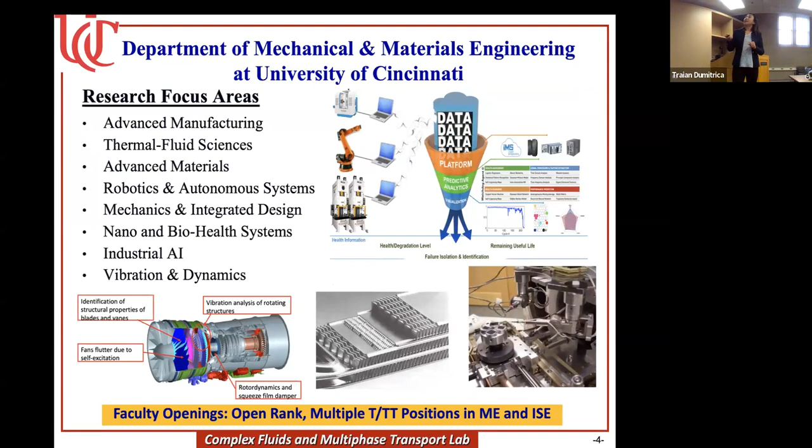Okay, so coming back to my research—I think some of you we met at the society meeting. Our lab is called Complex Fluid and Multiphase Transport. We stand at the interface of thermal fluid sciences, interested in surface science, particles, colloids, and in recent years, a lot of machine learning and AI to advance some basic understandings. Applications range from advanced manufacturing—we use inkjet printing as the additive manufacturing route—and also energy conversion and storage, we look at flow batteries and battery modeling, transport processes, also thermal management, especially in the context of the water-energy nexus. You try to minimize energy consumption when you purify water, and also use less water when you generate electricity.

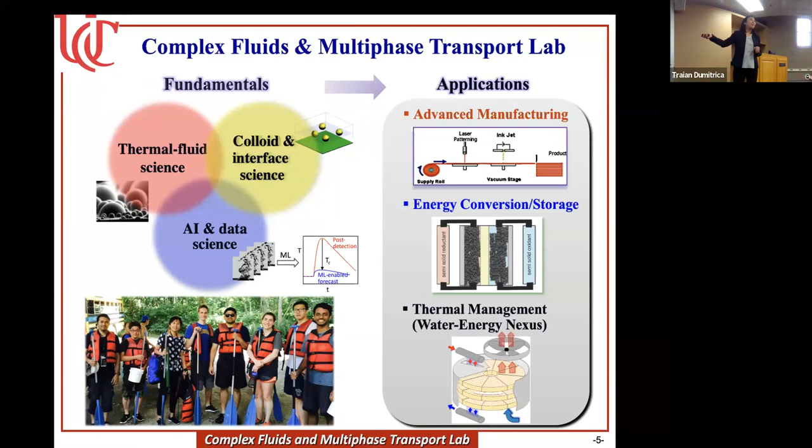Sorry to mention, but of course, students are the people who make everything happen in the lab, and thus professors travel and talk about research.

So I started with modeling, and I'm a modeling person—I was trained as a modeler. I look at heat and mass transfer, multi-phase flow with different physics, and some molecular dynamics, looking at phase change, and doing mesoscale, so-called lattice-Boltzmann simulation, looking at colloidal particle deposition, and also looking at some multi-physics of electrochemistry, looking at flow batteries.

This is an example of overpotential on the surface of carbon fiber, looking at some vanadium flow batteries, and also using molecular dynamics with reactive force field, looking at surface phenomena when you have water wetting a zinc oxide surface, and zinc oxide is photoactive, so with or without UV, you have some reactive wetting happening.

If you look at the multi-scale modeling with time and space, you have the traditional CFD, and you have this mesoscale lattice-Boltzmann, and you also have the molecular dynamic simulation with some reactive force field that account for bond breaking, bond forming, and in this so-called reactive force field, some kind of quantum mechanics simulation.

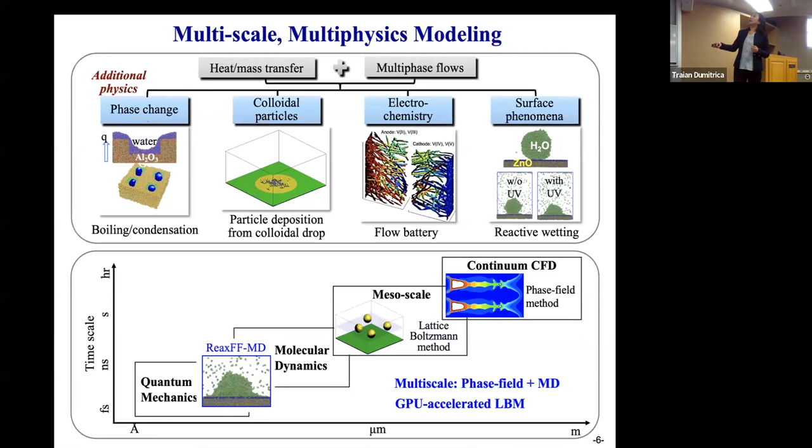We were focusing on using phase field or continuum level combined with molecular dynamics, doing multi-scale modeling with the help of accelerated mesoscale modeling, to look at how the wetting will happen, how the interface, the moving boundary, will material deliver to the contact line. So those are the modeling work we do.

In recent years, I think we talk about the total internal reflection microscopy, and more students get involved in experiment. So our lab has become a little bit more experimental, more than 50% now doing experimental work.

So this is the example of using optical methods. If you have an incident light hit a surface, and if it's above a certain angle, it will be totally reflected, and then generate the evanescent wave in the less dense medium, which has exponential decay. By looking at the intensity, the grayscale intensity of that light, you can actually probe.

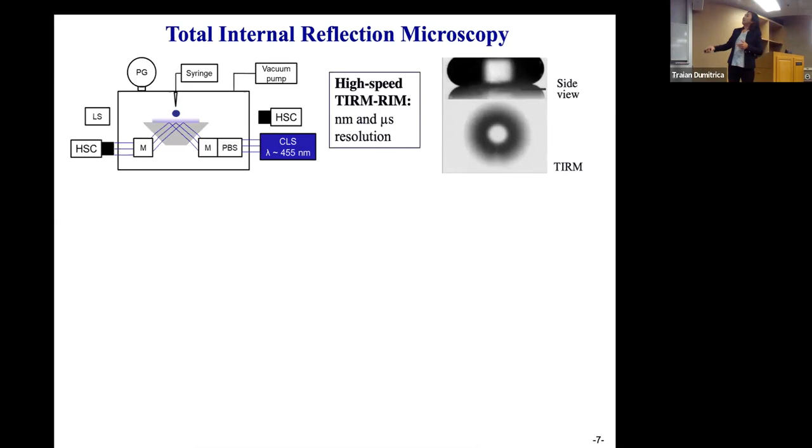So you probe this nanometer thin air film in a very accurate region, and then you 3D render. The top is the side view image, and the medium panel is the total internal reflection microscopy.

I look forward to the heat transfer work. This is without heat transfer, just room temperature. And then this is a 3D rendering of this total internal reflection.

This is like an 800 nanometer scale. So you can get the height profile at single nanometer resolution, depending on how fast your high-speed camera is, giving microsecond temporal resolution of your 3D gap profile.

That is very helpful for a lot of things, for example, boiling and nucleation, and that type of thing, whether the bubble or droplet actually hits the surface. So we use that to probe a lot of interfacial phenomena.

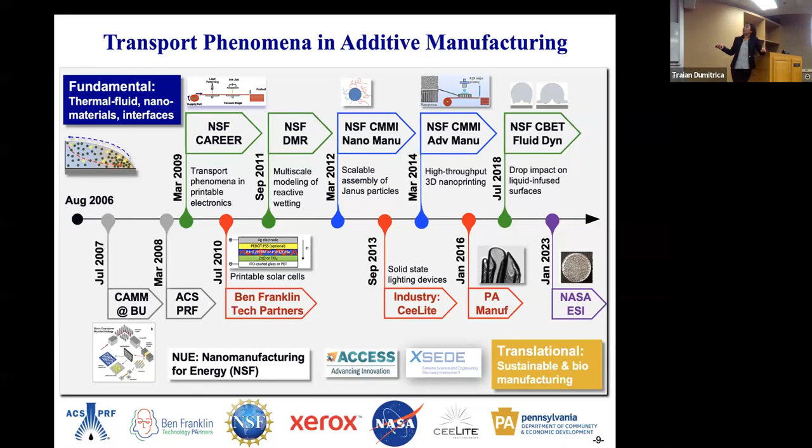So this is an example where we started trying to understand the evaporation process of inkjet printing of droplets with functional materials. You evaporate the solvent, the carrier liquid evaporates, and then you deposit functional materials. It can be electronics or other materials.

We studied the drying process using in situ characterization, observing from the bottom and looking at the velocity field, fluorescent microscopy of the life of a droplet, and doing simultaneous simulation using lattice Boltzmann methods, and also plasma and laser surface modification to help improve the status quo for better deposition control of those structures.

So this is an example of left and right, with everything else the same. We print 20 nanometer particles. So we look at this interferometry data. The left has more hydrophilic particles and the right has less hydrophilic particles, but everything else remains the same.

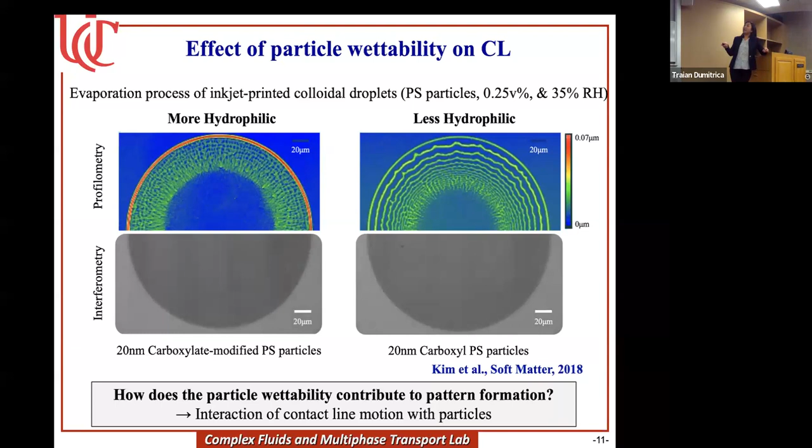What you see is the contact line being different because you have a zigzag motion in the less hydrophilic region on the right, but a continuous contact line movement on the left. This is really because if you do the force analysis of particles - surface tension force, static friction, electrostatic, van der Waals forces, and the drag force due to evaporatively driven flow - you find you need more particles to pin the contact line.

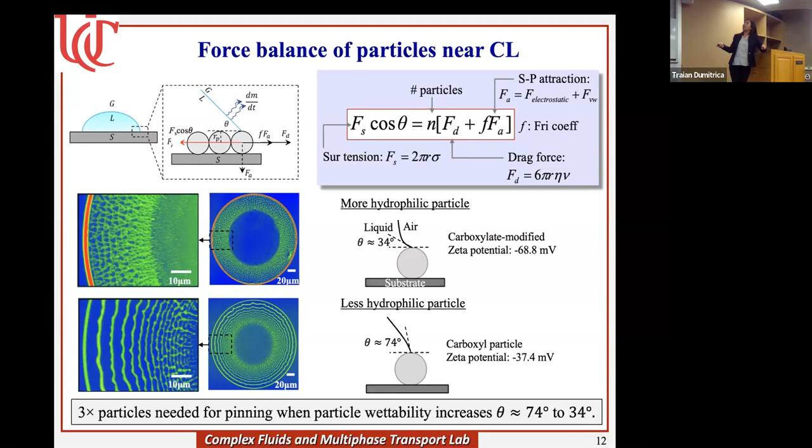You need more particles to pin the contact line. When you have more hydrophilic particles, the surface tension will pull the particle to the center, which results in a very different contact line motion and a different structure. So companies are interested in ring structures, and they really like this type of controlled ring structure deposition.

This ellipsoid versus spherical comparison relates to the so-called coffee ring structure - like when you have a coffee drop on a tissue, you'll notice the ring deposition, because evaporative driven flow will move the particle to the contact line edge and form a ring, the so-called coffee ring effect.

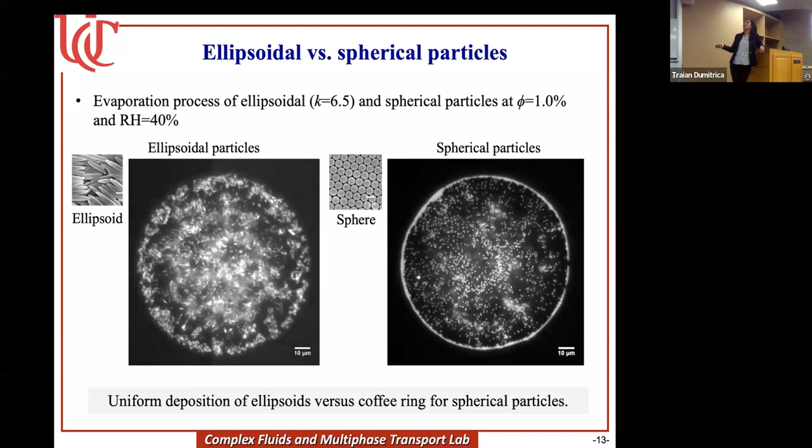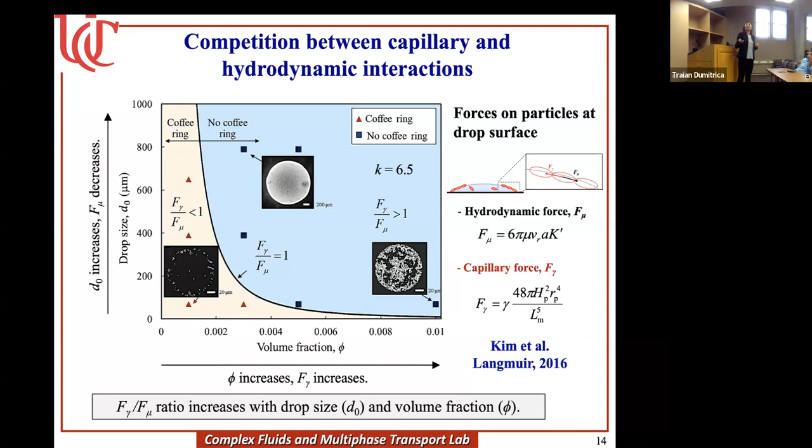So we wanted to understand the differences between spherical and ellipsoidal particles. If you look at the forces on the particle at the drop surface, the ellipsoidal particles have more adhesive forces and more capillary interactions among the particles. The capillary interactions help them stay at the surface of the droplet, while hydrodynamic forces push the particle to the edge of the droplet. The competition between those two forces eventually determines how the particle pattern will form. So we did a lot of this pattern formation type of work.

And so it was two-dimensional, and then we moved to three-dimensional. What happens if you look at three-dimensional structures? If you have a nanoporous structure, or just think about paper as a porous structure, if you print some electronics on paper, or these perovskite solar cells, they also wanted to have this nano confinement: how do you have nanoporous and three-dimensional structure in a very precise fashion? So we study that using combined simulation and experiments.

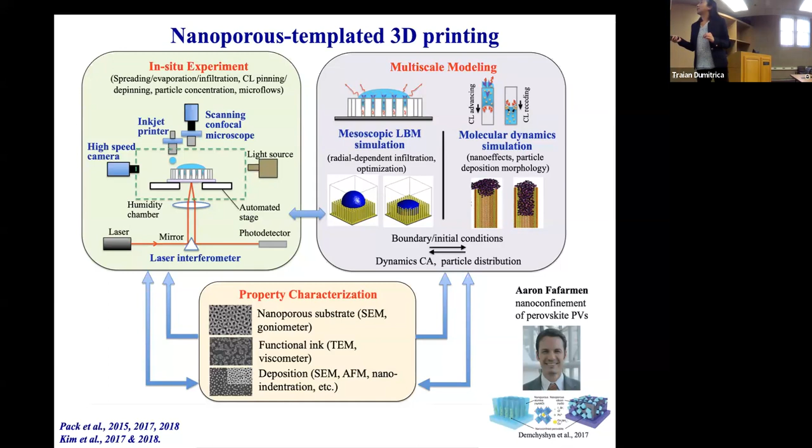And interestingly, if you have a third dimension, what happens is you have this interesting competition of particle motion, you have evaporation of the carrier liquid, you have also the infiltration, because the carrier liquid will actually wet your porous structure, and also you have the spreading effect.

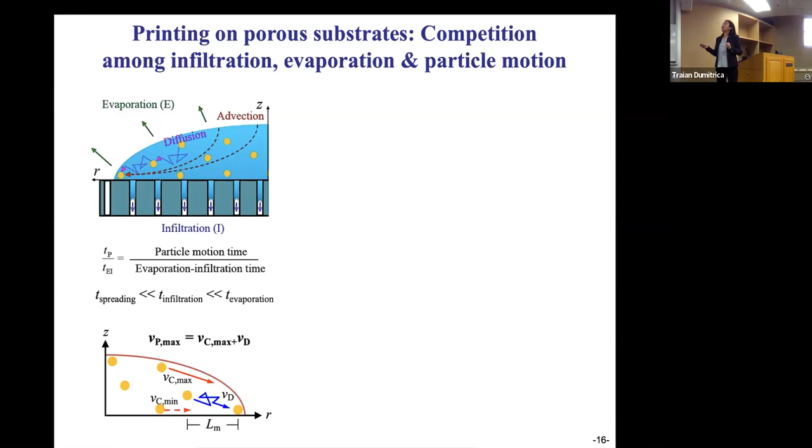And the competition of them, if you do the math, what you have is this contact angle versus the residual volume, which is how fast the evaporation will happen versus how fast the liquid is going to infiltrate the substrate that you print on. So you can have a really good kind of phase diagram to predict what the deposition will look like based on the evaporation model, and also the particle motion that is driven by both Brownian and evaporative driven motion.

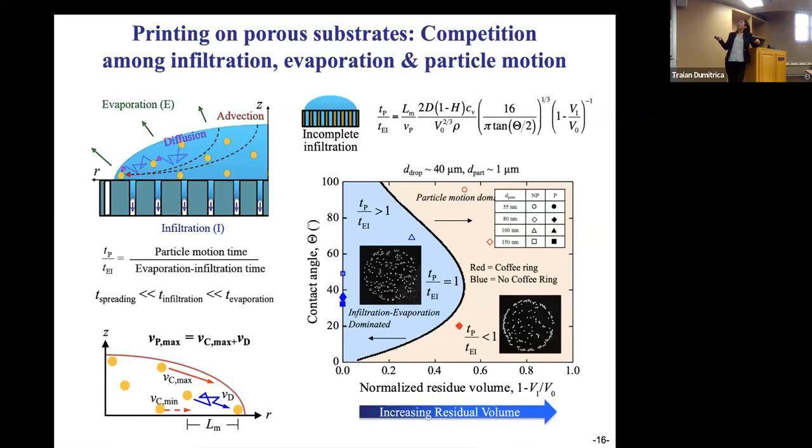And then we started working with our more biopolymer collaborators and tried to do tissue printing. They want to print hydrogel, basically gelatin, and then they can do swelling and non-swelling different structures, and have folding, and they do so-called 4D printing. It's three-dimensional, and after you print, they will swell, and based on how you design the swelling and non-swelling structures, they can fold in different shapes, to mimic different parts of the tissue.

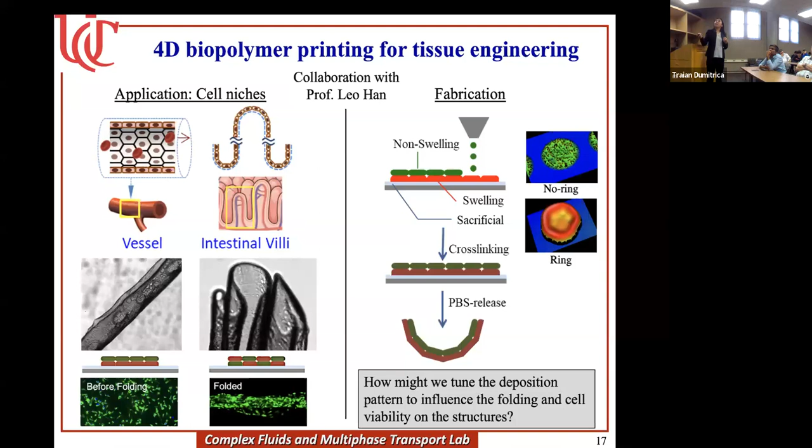So what we did is help them understand how we do biopolymer printing with different swelling ratios to control the deposition process, and how that structure will affect the final folded structures, the cell niches. So if you look at what they're printing, from a complex fluid perspective, we have water and glycerol, so it's bisolvent, and we have the gelatin, which is fish skin, dissolved, and then we make it more hydrophilic. We make the COOH group, carboxyl group, and then we have some surfactant. So it's a very complex process.

And when I look at the physics involved in this process, you guys are graduate students, you probably know what Marangoni flow is, right? It's a surface tension gradient driven flow. If you look at what happens in this droplet when you print biopolymer, which is gelatin, your water will evaporate, your glycerol is not going to evaporate, so you have a glycerol-rich region close to the contact line, the contact line will be pinned and not moving, and your biopolymer will accumulate more close to the contact line, and then it will kind of gel, and the surfactant is also redistributed.

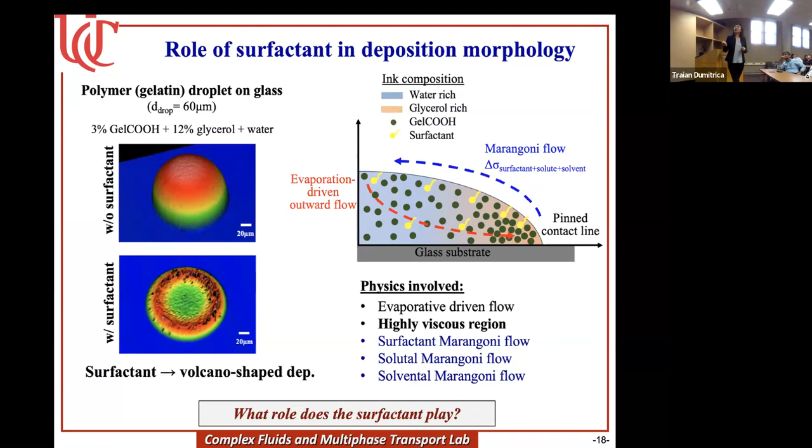You will have more surfactant close to the contact line, and then you create the surface tension gradient along the drop surface, so you have the surfactant Marangoni, and you have the polymer concentration being different, causing another surface tension gradient. So it's a very interesting, complex problem that we try to understand. And you do see that with or without the surfactant, you have very different deposition structures. The top one is without surfactant, and the bottom one is with surfactant. You can see a dome shape versus a volcano shape structure, and you wonder why.

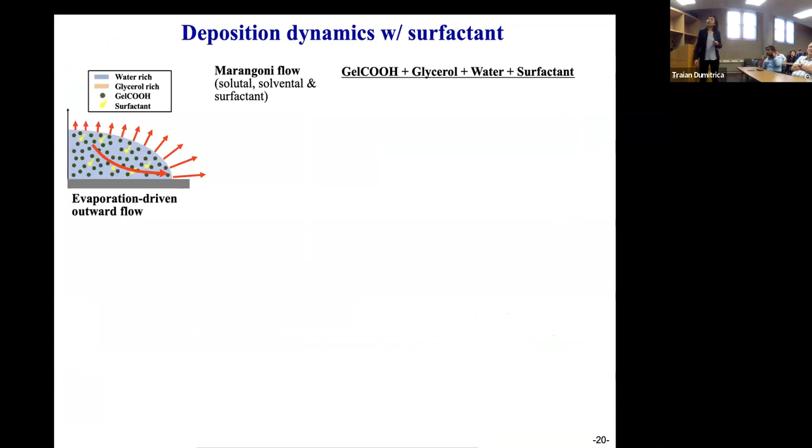So we don't know why, but why is it different from the traditional coffee ring? So we try to understand what's going on. And so what happens is when you have a colloidal drop, sessile drop evaporation, you have a larger evaporative flux at the contact region. And then it will cause the evaporatively driven outward flow.

And then you have more water evaporated, you have a lower surface tension and also a more solute-rich region in this contact line region, causing a Marangoni flow from the contact line to the center of the drop. However, due to the very large polymer content, you have a gelation in this contact line region, causing a local gel very close to the contact line.

And then your strong Marangoni will just circulate around, recirculate, causing a stagnation point closer to the contact line, and causing a zone where eventually, when the water evaporates and also the current liquid evaporates, you'll form a volcano-shaped deposition.

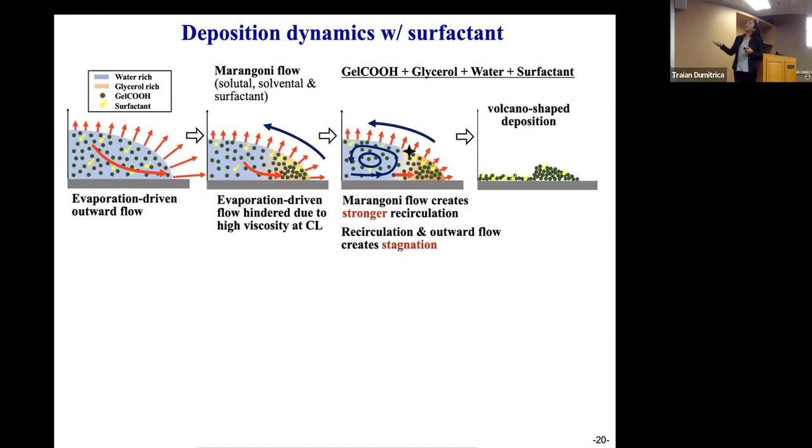So we did some PIV study, looking at different planes of the drop and different slices in the Z direction, and you do see that there's a stagnation line. You have a gelled region near the contact line where there's no velocity, but the particle is moving depending on where you are in the space. There's some evidence of this recirculation happening inside. There's a circulation flow as illustrated here inside the droplet.

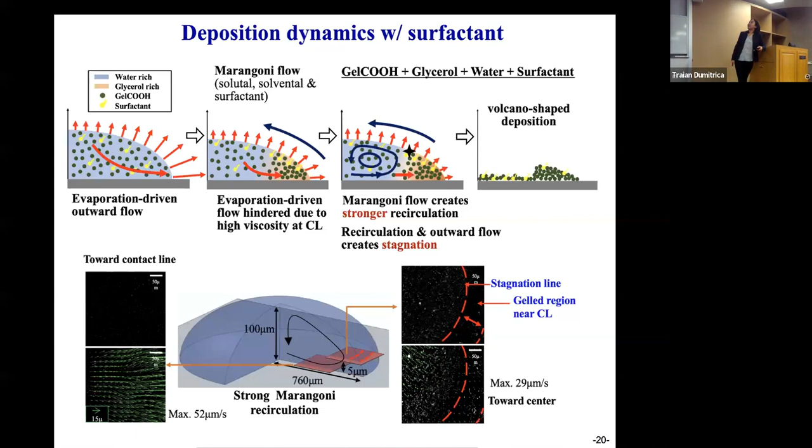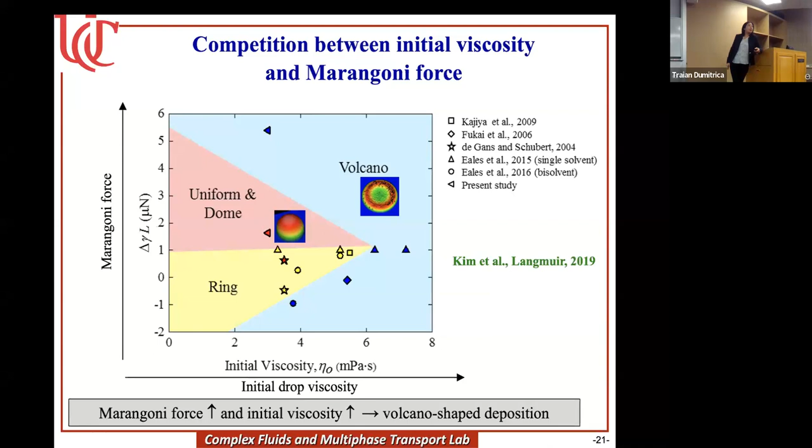This is very interesting and kind of counterintuitive, and is a result of biopolymers. They actually gel close to the contact line region, causing the deposition to be different from a regular suspension. And based on that, you can look at the competition between Marangoni force and the viscosity, basically the evaporatively driven flow. And then you can have a phase diagram looking at different shapes and compare with other people's experimental studies, and we get pretty interesting results.

And recently we're doing the NASA ESI project, early stage innovation project, which is 3D printing of titanium for a loop heat pipe, where you can drive more liquid over a longer loop with less contact. You have a lot of heat loss in the contact regions, so you minimize the surface contact and try to have an all-in-one titanium panel with the radiator and the heat pipes. So this is through a 3D printing process.

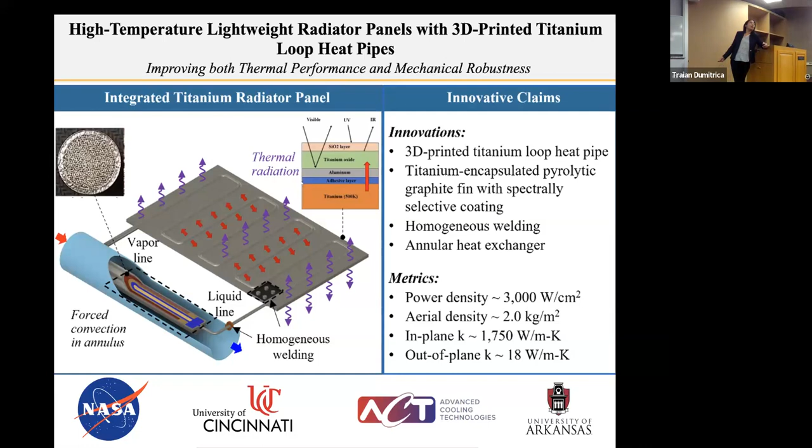So this is the cross section of the very porous heat pipe that we print. You try to make the wick as small as possible, like 5 micron pores. So this is the project that we are trying to do to have a very high conductivity and also a very small contact resistance by printing this structure of titanium. A lightweight, high temperature loop heat pipe in one build.

Here I show some experimental work in the context of, I think with some of you we talked about, the liquid infused surface. So this is also the liquid infused surface that we are interested in. So if you have a lubricant infused surface, you have some micro and nano structures, and then you put a lubricant in there, and it's a wet surface.

And originally, this comes from nature, like a pitcher plant. When it's wet, the surface becomes super slippery. And you can use that for different applications, even anti-icing, or self-cleaning surfaces, right? So our interest is more from a fundamental fluid dynamics perspective.

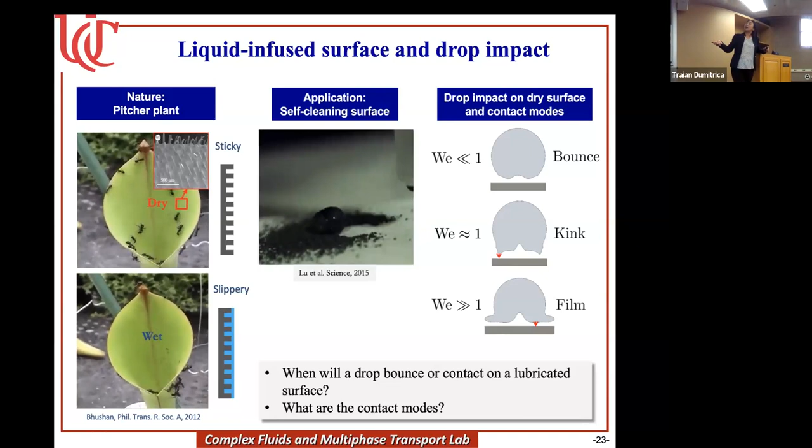If you spray droplets on this type of super slippery surface, what is the impact? Do you have direct contact, or you don't have direct contact? What happens if the film fails? So what we use is the total reflection microscopy that I introduced at the beginning, to study the failure modes of the droplet interacting with the surface.

So on the left are the possible contact modes for a dry surface. You either bounce if the Weber number is small, which means your impact velocity is small. If you increase your velocity, then you start to have failure; the droplet will hit the surface and make direct contact. And when you have a lubricated surface, you can think about it as an atomically smooth surface.

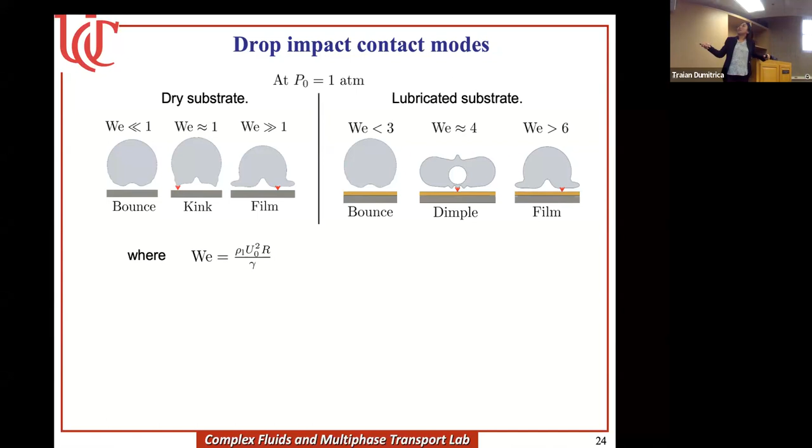So we make the lubricant very, very viscous, so basically it becomes a super smooth surface. And then we really use that to study what happens with the different contact modes. And so we use total internal reflection microscopy and probe the air layer between the droplet and the surface.

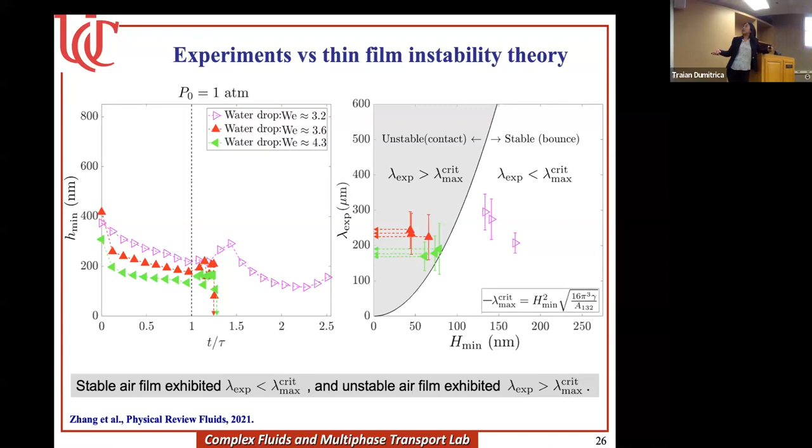So I think if you can, we really look forward to the boiling study. No pressure. Well, I feel like you gave me a lot of pressure when you introduced me. Now it's pressure back to encourage you to do the heating work.

So again, we did not have heat transfer. This is purely fluid dynamics, because with heat transfer it is more complex to control everything: the temperature, having everything uniform, and the heat flux that you want.

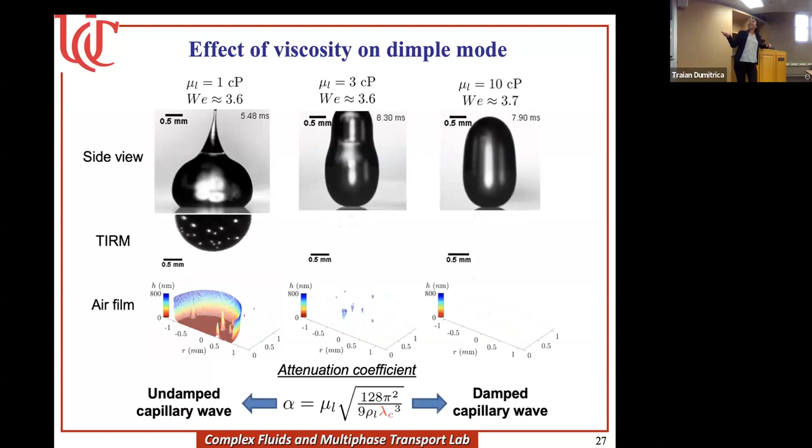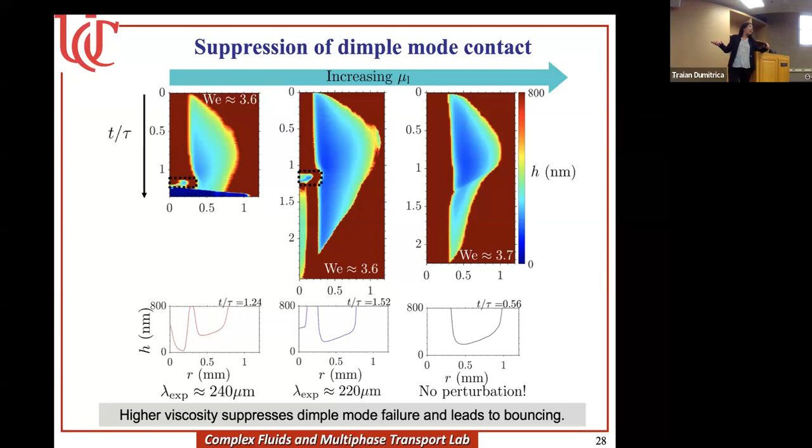Okay, so this is again the same thing, but we look at the history. The color shows the height profile, and this axis is the time. So basically it shows you what the air film profile looks like as a function of time and how it moves. So it's very powerful. You just have to set it up very clean.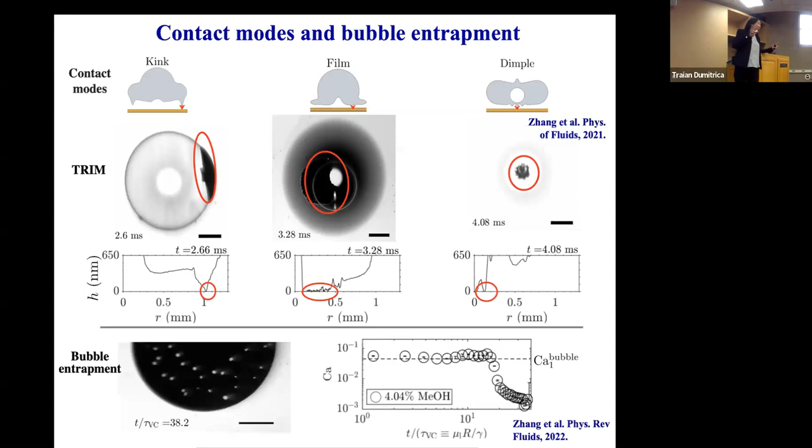And then we study different contact modes, and how, after the contact, what the post contact looks like. Sometimes you trap bubbles, and we wonder why. I think we talked about the ice in summer, you don't have any bubbles in the middle, and that made me think a little bit about the trapping of bubbles when we had dinner talking about this stuff yesterday.

So you can see some bubble entrapment, and we find this is related to the contact line velocity, basically the capillary number of the contact line velocity. When you are above a certain threshold, it will trap bubbles, and below it you will no longer have those trapped bubbles.

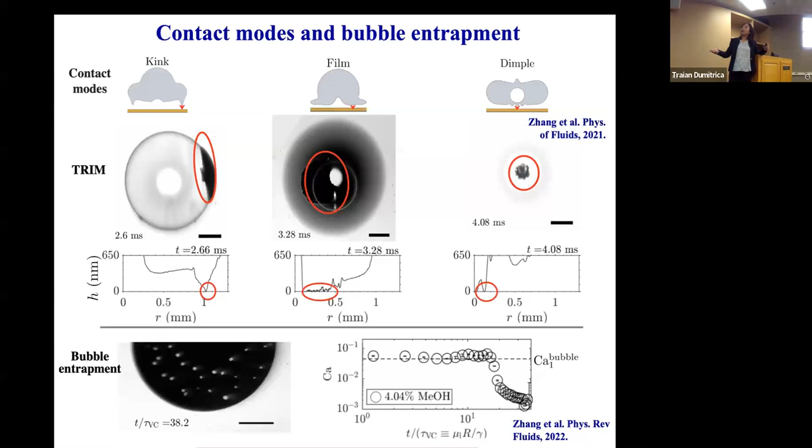So then what we changed is decreasing the surface tension of the liquid. By decreasing the surface tension of the liquid, the threshold will increase. So basically you will not have any trapped bubbles just by changing the surface tension of the fluid that you're wetting.

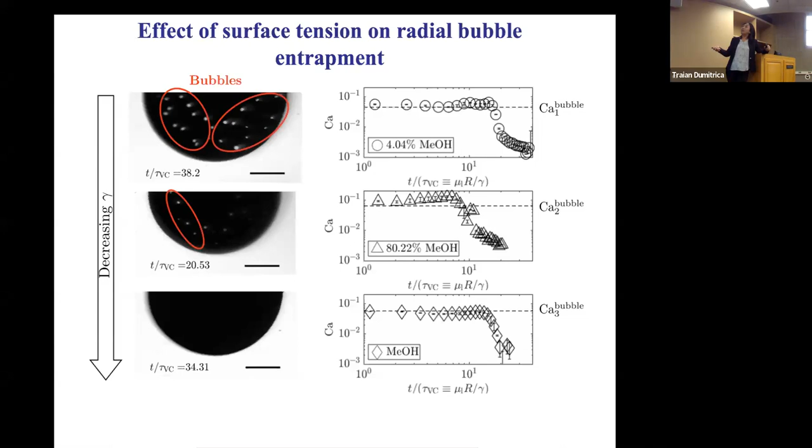So just to summarize this part, we're very interested in fluids. I really want to share a lot of the fluid work that we do. We study, using total internal reflection microscopy, the pre-contact air film stability and the contact modes. We also try to understand the post-contact wetting phenomena and also the bubble entrapment, and how that will be related to the viscosity of the liquid and the impact velocity that change the wetting phenomena.

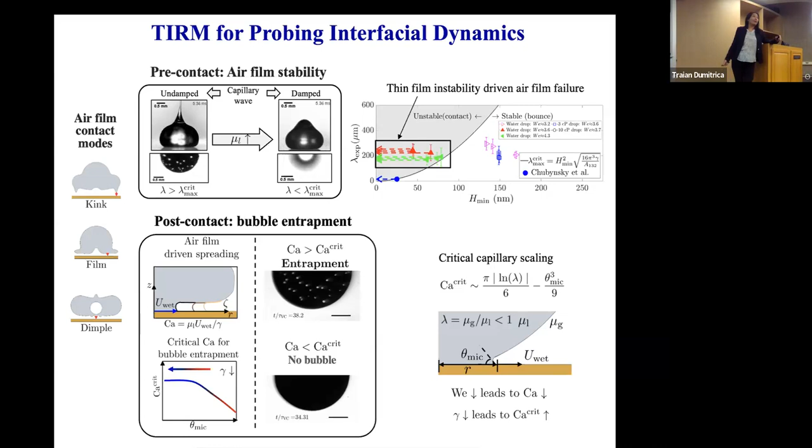And this is a very interesting work that we have done. I hope this can be extended more in the heat transfer community very soon. So recently, another interesting thing we just started doing: last month, we got a new project looking at using acoustic sensing to study flow boiling and condensation. This is under microgravity in the International Space Station.

We believe that with acoustic sensing, basically you listen, you can probe using higher frequency, using either acoustic emission or a microphone or hydrophone in the liquid, because you can actually probe a bigger range of frequency compared to optical imaging. We hypothesize that a lot of instability, including what triggers the critical heat flux in boiling, is related to some high frequency instabilities.

We hope to use acoustic sensing to detect some interesting interfacial instabilities, and also in microgravity, a lot of these instabilities are separated in nature, so they are decoupled inherently. So that's something we look forward to, using the NASA setup and putting in the acoustic sensor. Those are the NASA existing facilities at the International Space Station. One is a flow boiling module, one is a flow condensation module. Those cost tens of millions of dollars to build.

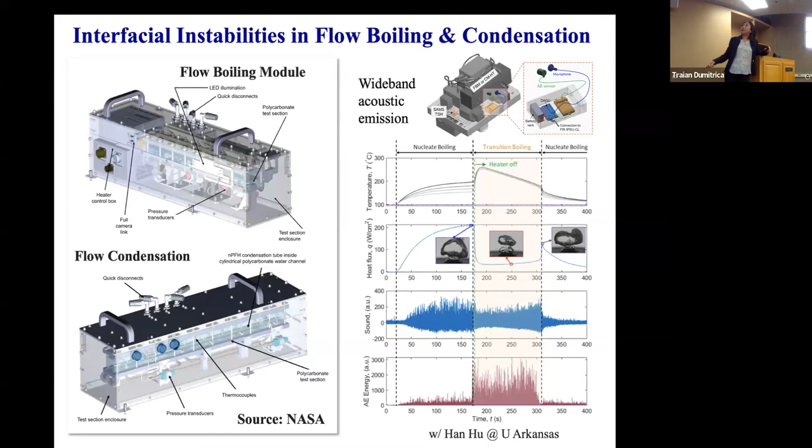So I don't know how much time I have. How much time do I have? Or it's over? It's over. Okay. Okay, 5 minutes. That's great.

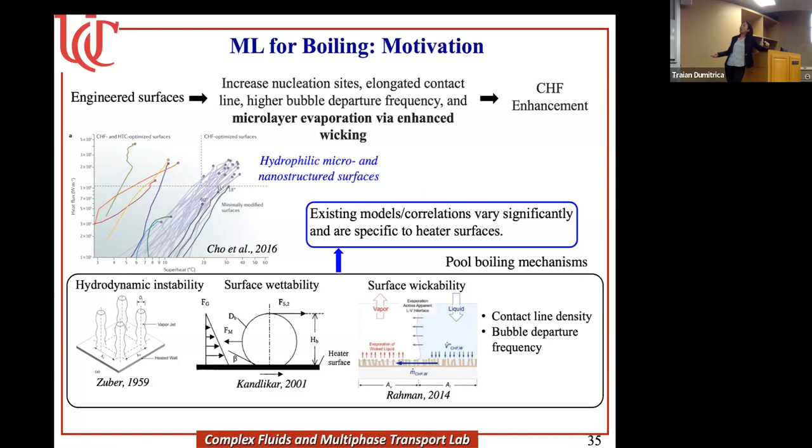So now we talk a little bit about machine learning. Boiling is a very good example of what we thought would be good to use machine learning for, because the physics is so complex, right? Pure physics-driven work will find it difficult to really understand the different instabilities, and everybody seems to not agree with some of the mechanisms. So we thought, okay, let's give it a chance and see what machine learning can do for us.

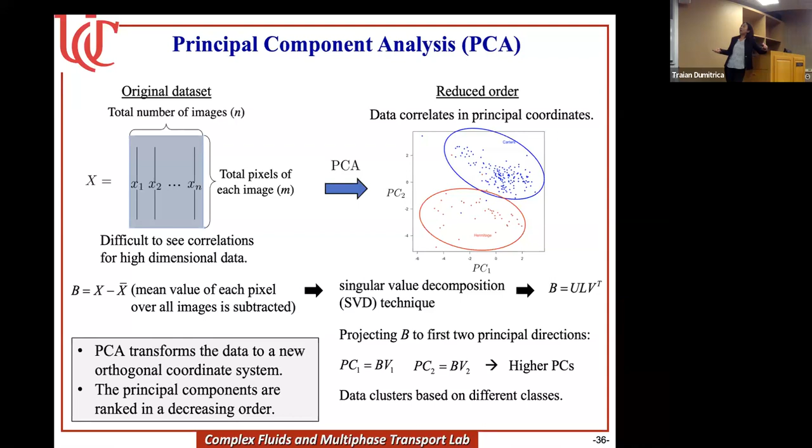So one thing we were doing is principal component analysis, which is unsupervised learning. So we did not train the model. What we did was look at, for example, images, reduce the dimensions of the image, and then try to correlate data and find the most dominant principal coordinates, and then we look at the components and see whether we can cluster data into different classes.

And that will help us. So this is not traditional supervised learning. If you can think about a cat and dog type of, basically, how do you go from the bubble image data set to bubble statistics in terms of bubble size and count. So we don't do any of those tagging.

So what we did was just, having input as the images, we do the principal component analysis, try to find the dominating parameters, and then we try to interpret those dominating frequency and dominating amplitude and correlate with the bubble size and count or other parameters. And that really helps us to separate the significant and insignificant features and extract some very important signatures, and it becomes computationally less expensive.

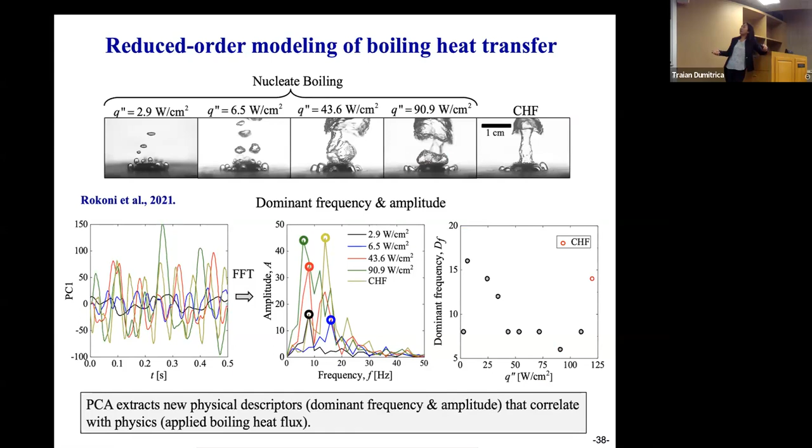So this is, for example, nucleate boiling and critical heat flux. And then we look at the dominating frequency of these images. We did not train, we just feed the model. And then we see when you have critical heat flux, you have a big jump. This is with heat flux and a big jump in this dominating frequency.

And then we tried using different surfaces. We have some different data sets from us in-house, from other universities, collaborators with copper, plain surface versus microporous surface with different foam structures. And what we find is a lot of interesting things: you do detect this regime change of the signatures directly from images without any physics involved.

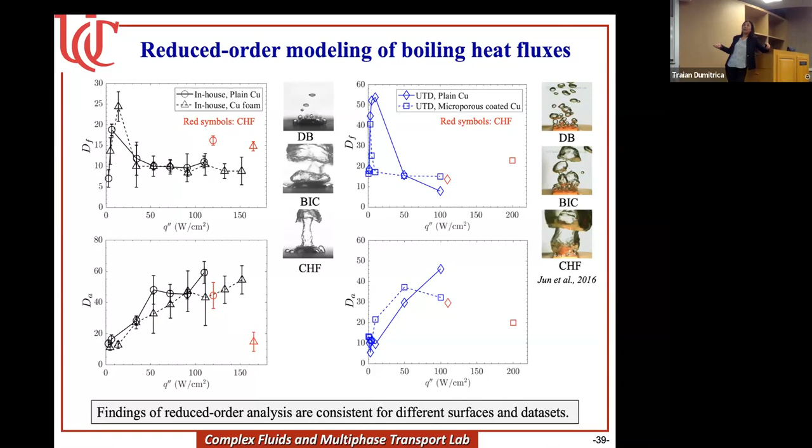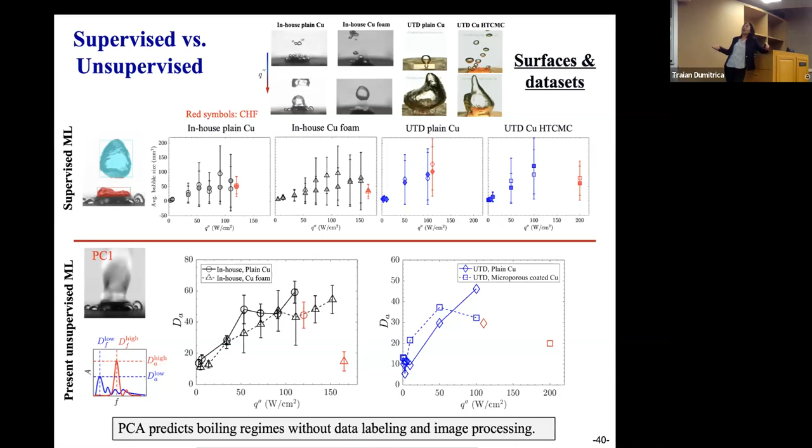So this is the example of what we do with supervised versus unsupervised learning. In supervised learning, you basically have to tag and train the models, and then it becomes really tricky. Your error becomes a really large uncertainty because manually, for example, the size of the bubble, you cannot tag very accurately. So you have this big error bar. But without any training and using this reduced order analysis, you get much cleaner data, clean classification.

And it's interesting, not only for water, we also extended to low surface tension fluid and coolant, for example, HFE. This is a 3M refrigerant, and you can see the capillary numbers, capillary lengths all changed, but you have a lot of interesting different phenomena. But when you do the machine learning work, you get a very clear signature when you have a regime change from purely image processing, the principal component analysis study.

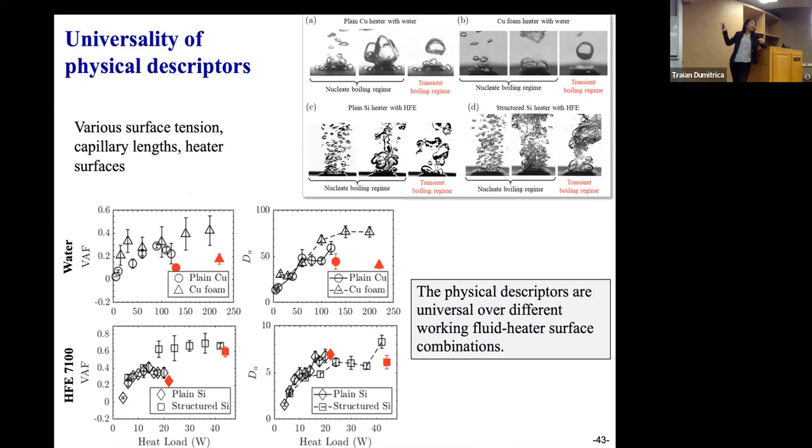So I think if you haven't tried, it'll be worth trying. So we're very excited about these results. I do realize that the future, of course, is to have more physics-informed, physics-integrated machine learning. But this is purely data-driven. It gives you some very interesting insight.

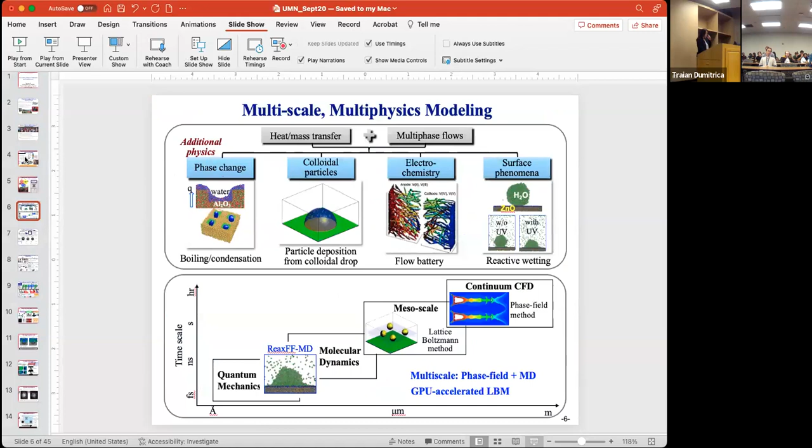So I think I have the timing of the video. The time scale, for example, I can show this example. So the video timing is in milliseconds, I don't know if you can see. We're using a high-speed camera, and this is a much slowed down video, of course. So yeah, it's very short, I think it's several milliseconds.

Yeah, so of course we non-dimensionalize it, using the capillary time scale. In the publication this video is not the non-dimensionalized time, it's real time, but it's a slowed down video. You can see at about 5 milliseconds the contact happened on the left.

Which is a water droplet. And then as you increase the viscosity, the capillary wave will be damped down, will not trigger the cavitation, and will not trigger the thin air film instability at the bottom. So does that explain it?

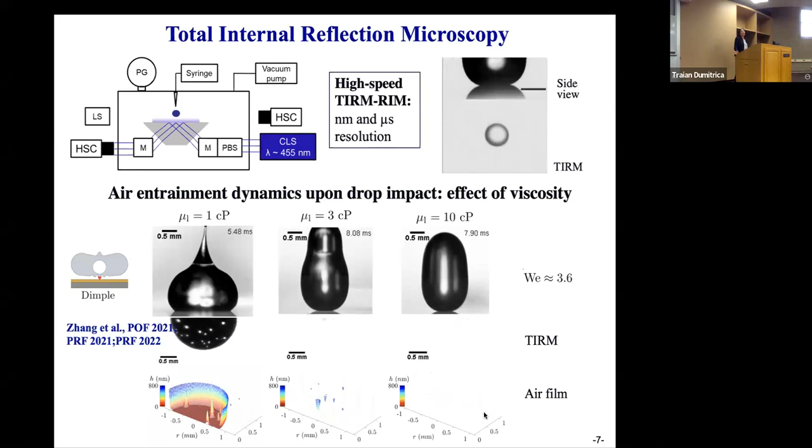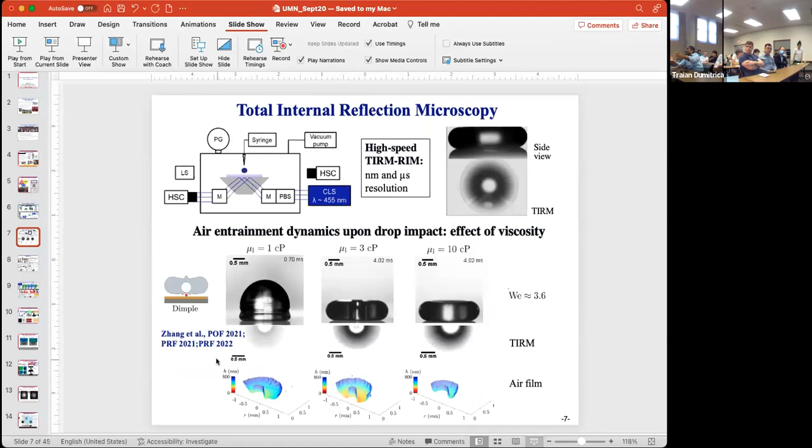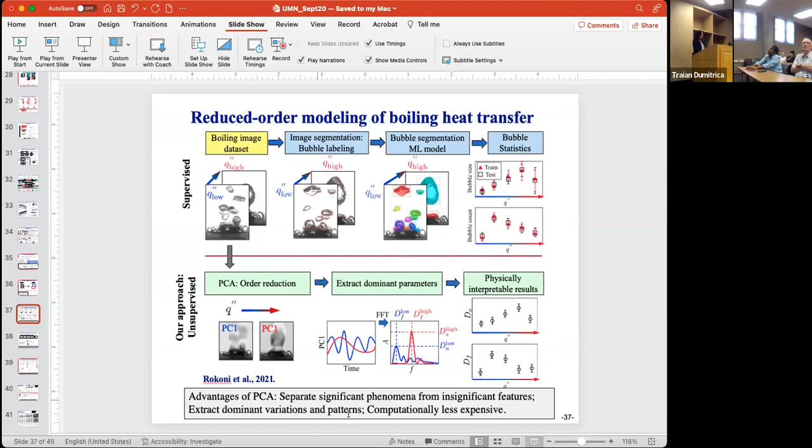So, go ahead. So the principal component analysis, it's a matrix, you are taking an eigenvector essentially, and that's going to give you some vector, some shape. Does that shape match the contact line of bubbles, where the heat transfer is maximum, or is it more random than that?

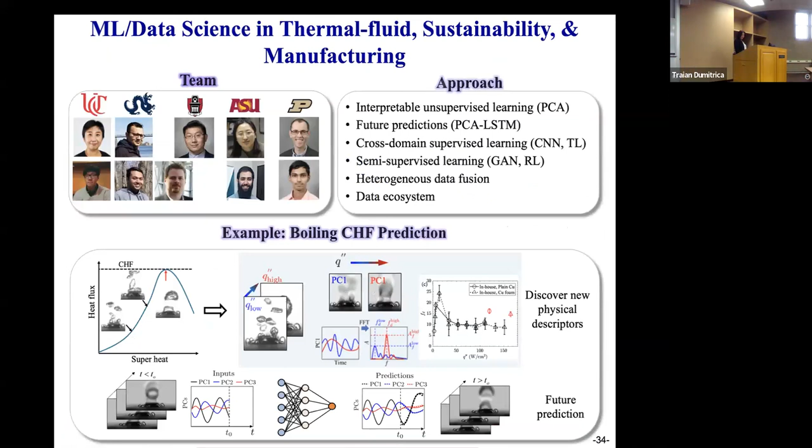Yeah, that's what I would ask too, it's a very good question. So if you look at this, this is what you see from the reduced order image, but you don't get exactly the bubble. It's not exactly the bubble, it kind of resembles some of it, but it's more the boundary of the bubble and also the size of the bubbles. If the bubbles are not moving, you don't get it.

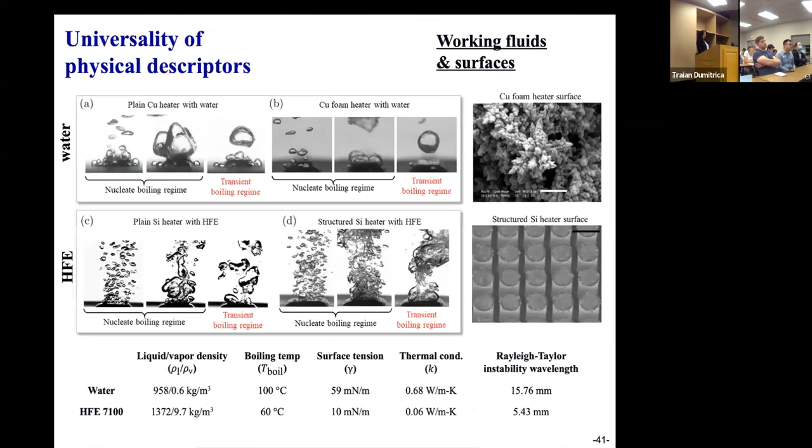It's interesting, let me show you what happened. So you reduce the dimension and then do a so-called trick we used, it's a long short-term memory model, similar to how Google search or language processing works. This is used to predict the future, based on the previous time step you can see what the boiling would look like in reduced order, and then we can use that to get back to the real dimension.

But you can only do it for a very short time, otherwise the error will go quickly bad. Right, yeah, so that model has to be improved.

I think the reason I asked was because if you go back to 1990-something, Kenning, with liquid crystals, actually used non-orthogonal functions, which are more like circular, and those seem to do a very good job with this limited data set of getting the fields right, as opposed to PCA, which is more like a Fourier analog, no directionality, no structure, whereas the bubble field has structure.

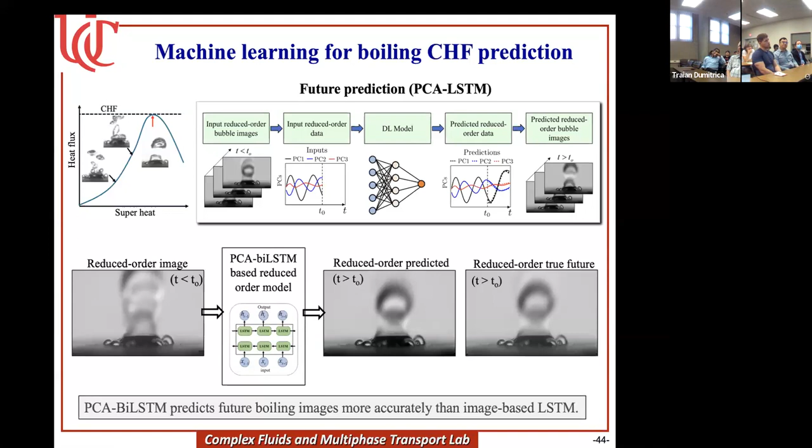Yes, last question. Okay, yeah. Professor Sun, fascinating talk. I have a question about the experimental conditions - can you comment on the control of experimental conditions?

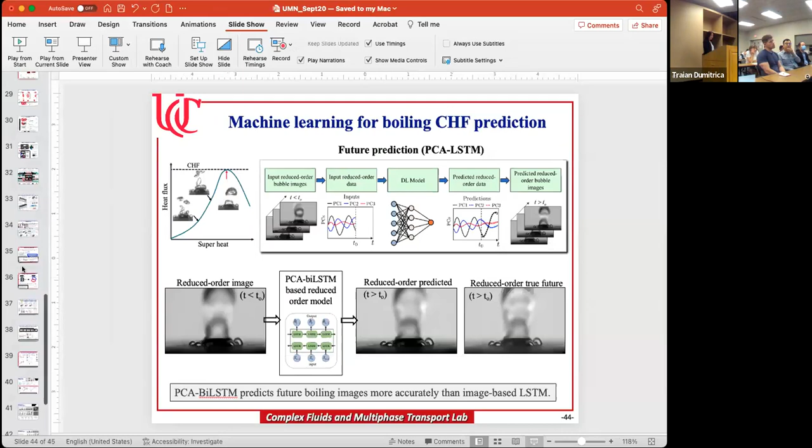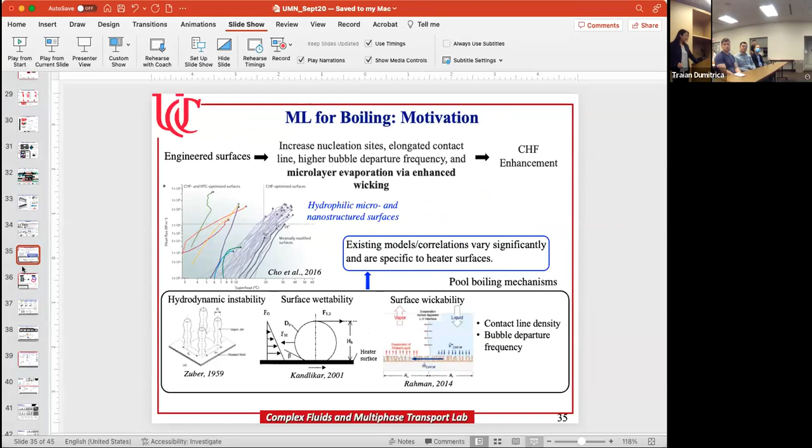You're talking about collecting data from several groups, building a data bank. I don't know machine learning too well, but I feel like if, for example, the surface roughness is not controlled the same between different groups, the data inherently will be different - for example, the bubble generation rate. So in your machine learning models, will you put all the data together regardless of the experimental conditions, or do you categorize the experiments?

We think the model should be universal - it should not be dependent on the structure, should be independent of the working fluids, and should definitely be independent of the surface textures. So we try to detect a more general trend.

But I feel in the future it's still a combination of data and physics-based approaches. It can detect some regime change, but it probably won't give you a very quantitative heat flux versus image correlation. You cannot see the boiling image and tell me what the heat flux is without doing any thermal measurement. I don't feel we can be that accurate. We try to correlate the image with the heat flux, but I don't believe it's going to be that accurate now. So basically, if you get an image, you'd try to predict the instantaneous heat flux just from looking at the boiling image, but I don't think we're there yet.

It is an effort to try to get there. The reason we started doing acoustic work wasn't because of microgravity - it was because a professor at IIT published work using an acoustic hydrophone to study purely from the hydrophone signal the boiling correlation with heat flux. We thought, this is interesting - cameras are expensive, but putting a hydrophone in the water to detect boiling is very easy to do, and they got really good correlation between the hydrophone signal and the instantaneous heat flux.